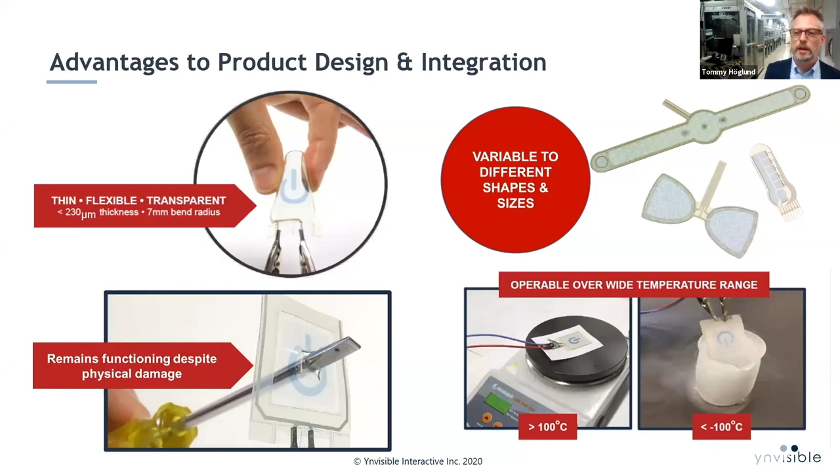And also, it's very robust. It won't break. So it's really fun to work with such a well-performing display technology.

The display technology we have can be used hundreds of thousands of times and be reversible. This is perfect for health and well-being, looking into perhaps medtech applications, as well as retail and other more simple consumer electronic products. But it's also available as irreversible, showing off only one time.

This is, of course, excellent for different security purposes, fast-moving consumer goods, and quality assurance, and perfectly suitable also for being disposable and put into high volumes and lower costs. This is an example where you could see the irreversible display in an application as an impact label.

One of the key features of our display technology is that it's printable, and it can be printed in quite a regular print house environment. This allows you to move this technology out to different places around the globe, which is perhaps highlighted very much today when we're living in a pandemic situation. And you look into, as a company, that you should have multiple sources for production.

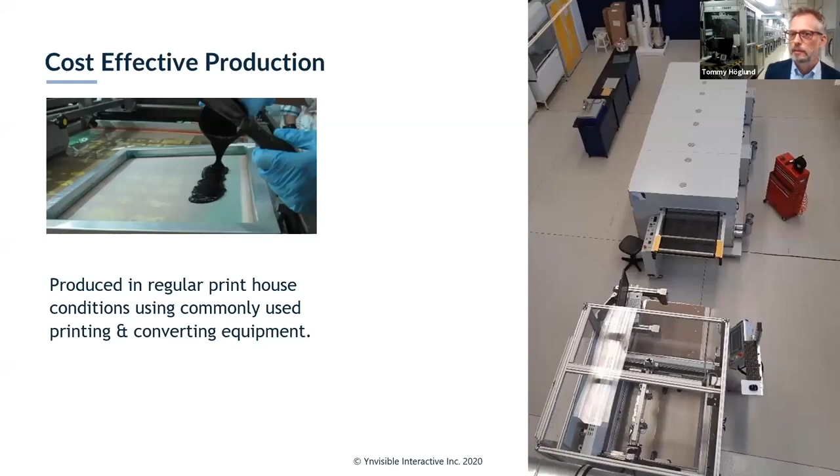So let's talk a bit about examples of printed electronic systems and electrochromic displays, and also connecting to Evonik's talk right before me here on the energy source.

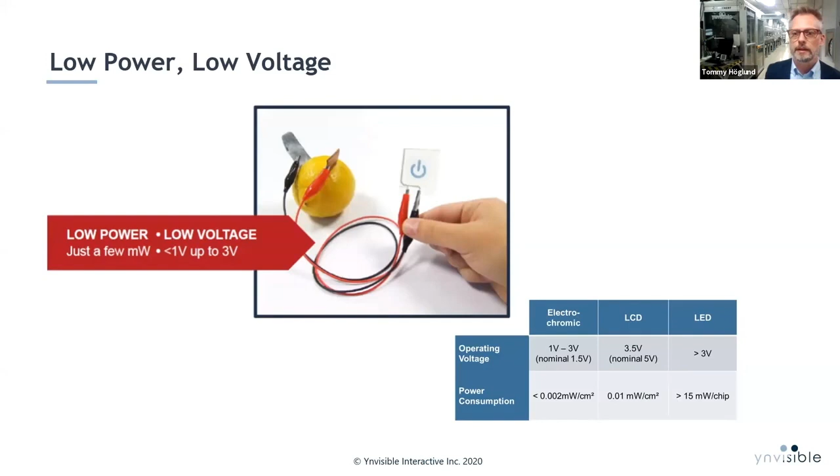Our display really has a low power consumption, and this is a key driver for us - we can allow just a few milliwatts to drive this display and consume very, very little energy. That is a key in almost all applications.

And then using this new TAeTTOOz battery is for us a brilliant solution, where we make use of the form factor. And here's the first video of it, where we show this in a rechargeable way.

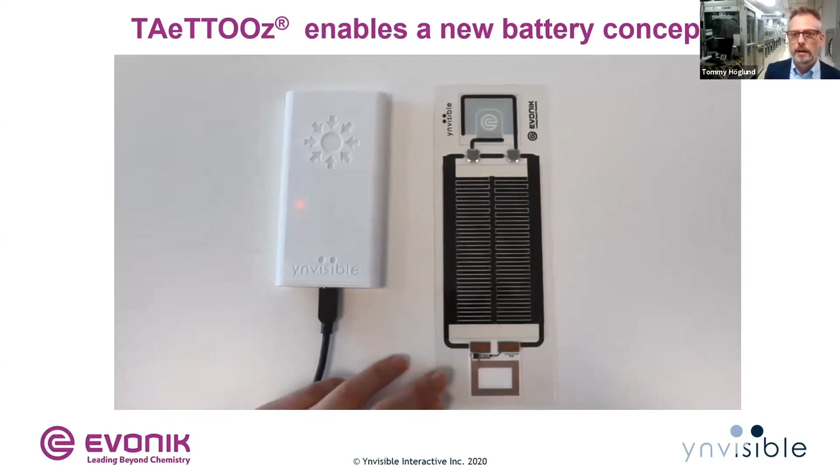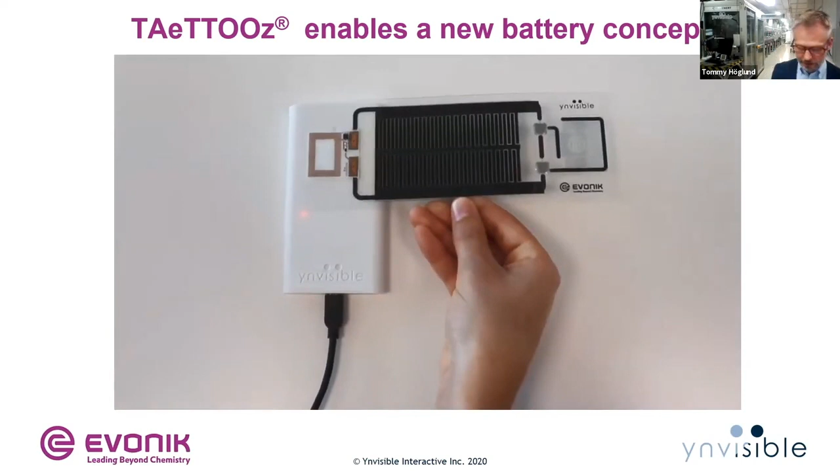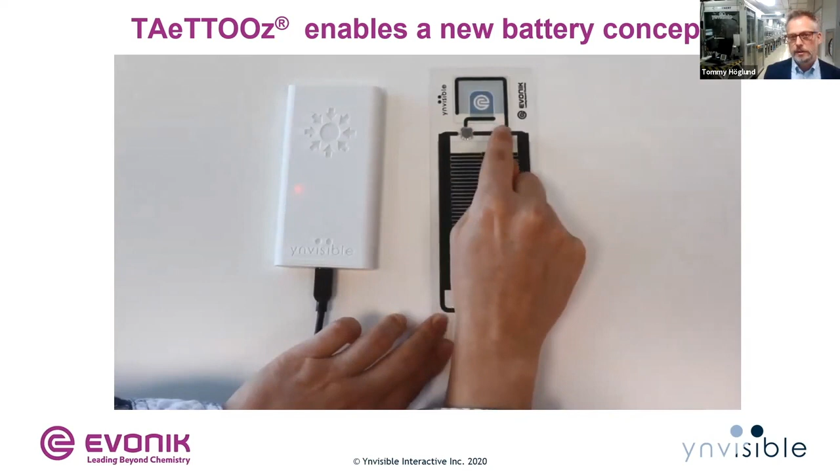Here you can see that the display is not turned on. You recharge the battery in just a few seconds, and after recharging, the battery really retains the energy. The recharging can be done in multiple different places - in production, during the logistics chain, in the retail, and even by the end user. And recharging could be done in several ways: wirelessly, as you see, but also using solar cells, for example.

So talking about systems, I want to show one example of a display structure and a printed electronics hybrid system. So how do you create these types of product? Well, you start with some type of substrate.

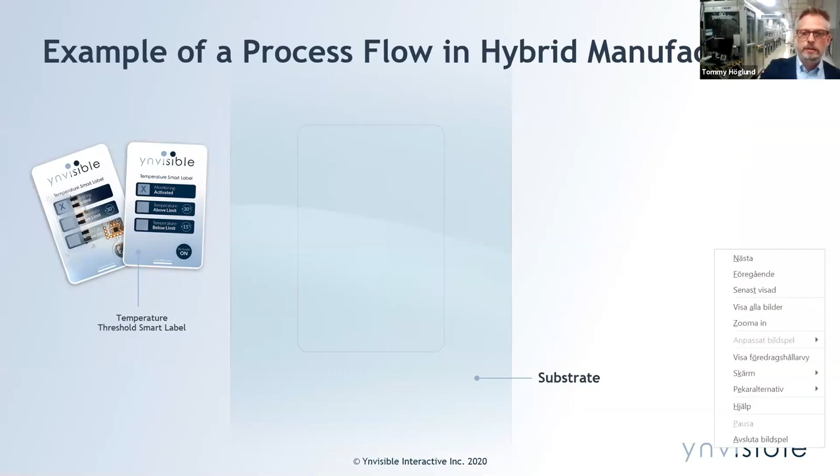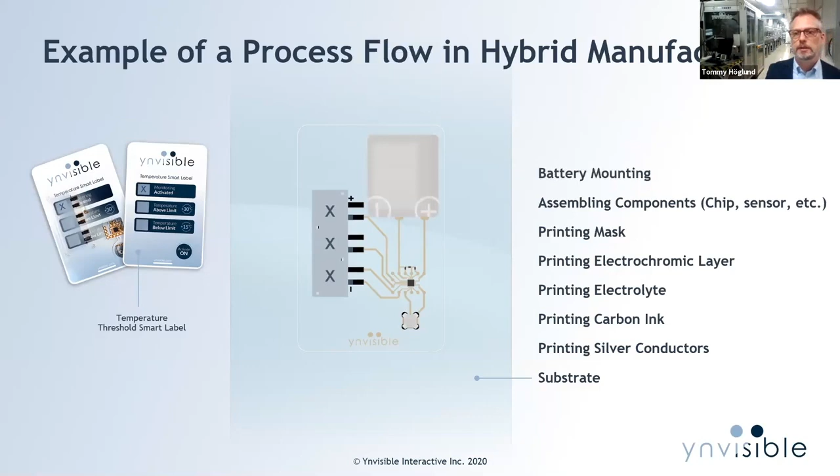Then we print the silver conductors, and after that you might print the carbon ink, and you print the electrolyte, and you print the electrochromic layer. In this case, we also print a mask to create the pattern. And here you have the displays, and then you also add some conventional electronics as a chip and the sensor. In this case, you also mount a battery and a graphical layer. And there you are, and you have created a product.

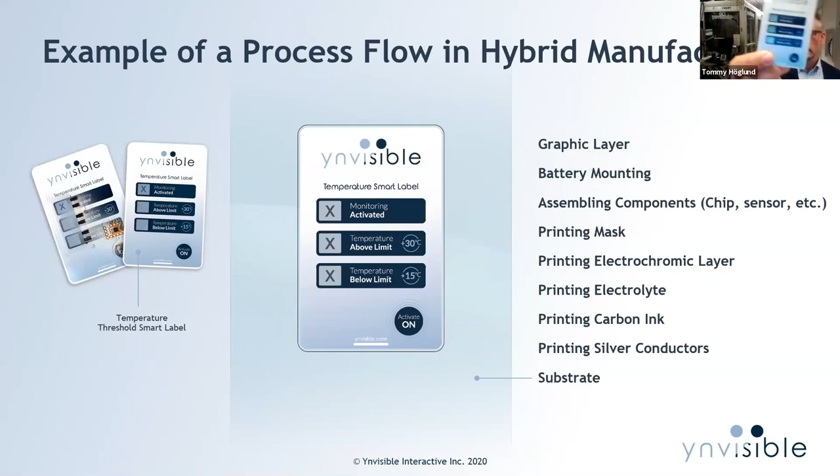And this is actually a product that looks like this. It's actually available and for real. It really functions.

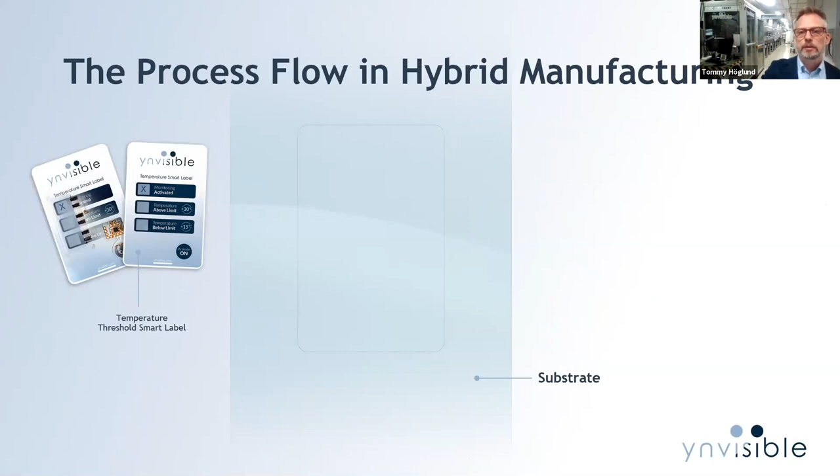But it's also possible now, when you have these new types of materials emerging that Evonik has created, that you can actually do part of this and get rid of some of the assembly processes, having even lower costs and more efficient production, where you use the same material set for parts of the display and the energy source.

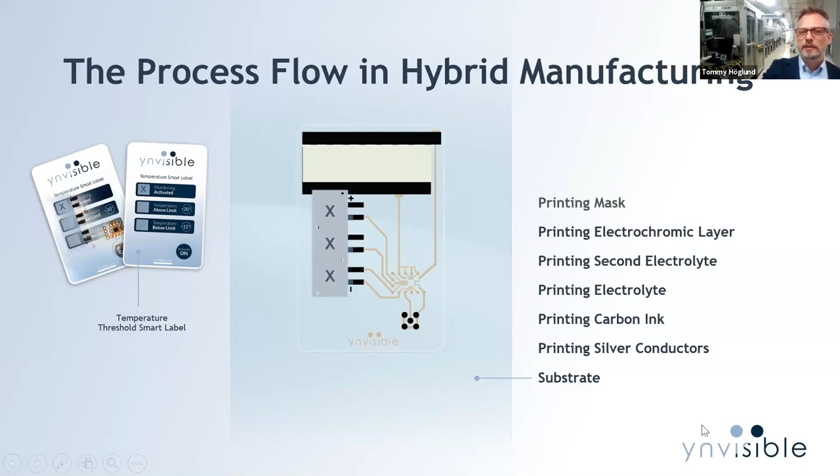Let's see. You print electrolyte and the second electrolyte layer. I wanted us to show that we printed the same electrolyte layer, but my technician said, Tommy, let's wait until it's perfectly fine-tuned for that. And then you print on the other layers and the assembly and the graphical layer, and you have this fully functional system, almost all printed.

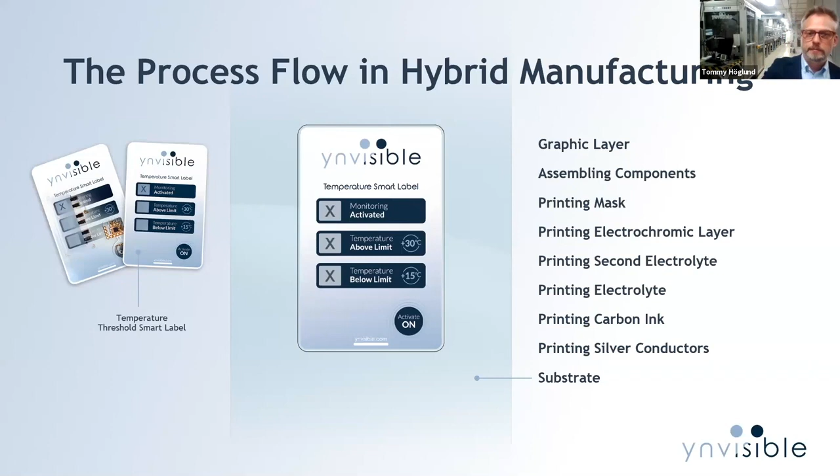And we start to see more and more of these completely printed products and systems. For both fully printed and hybrid systems, we have the delivery capability of producing roll-to-roll high-volume production, as well as quality assurance in our roll-to-roll testing equipment, and converting as well. So we deliver today commercial products from Ynvisible in this production line and help other companies scaling up.

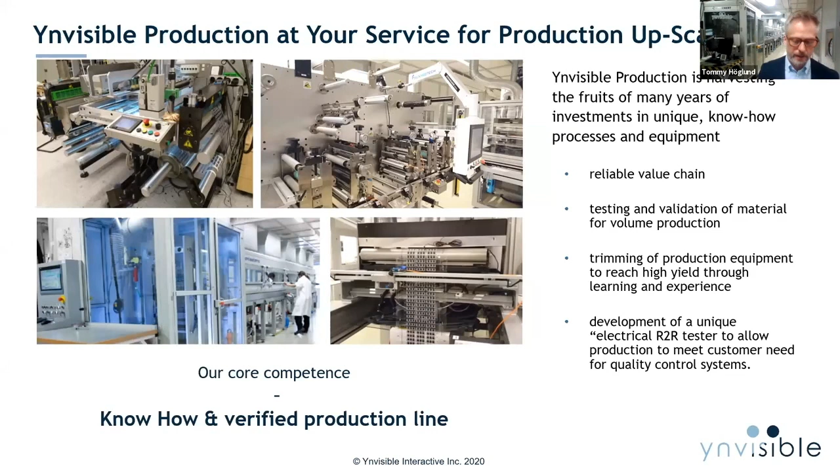So our business model, as shown also by Ines, is really about having an emerging technology available for all companies, no matter what maturity stage you are at. We can help you all the way from design or from ideation through design, prototyping, and to scale up and production, and from there, even to tech transfer to other sites if you want that. So being a small company, we have a great offering allowing us to work with any company at any maturity stage.